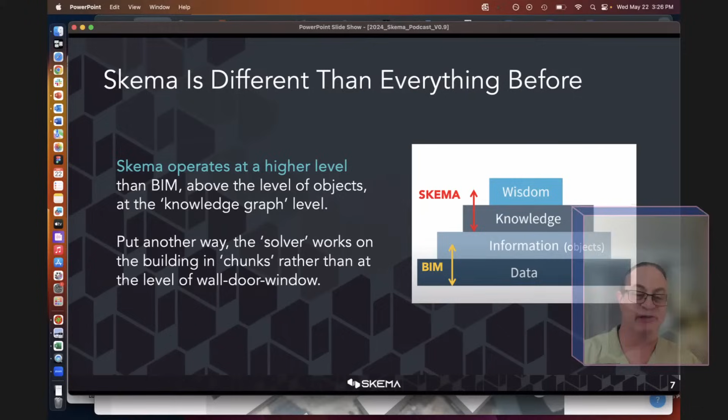And it turns out this is the way that senior design principals think about it. They think about an apartment building as the number of apartment units and of what type. Somebody doing a hospital thinks about, this hospital has to be 200 beds. And then what are all the ratios of support spaces to support 200 beds? And if you're going to do a school, you're thinking, oh, well, I'm going to have 4 grades and each of them is going to have a certain number of students. That requires this many classrooms. And so then what are all the support spaces for a school that has that many classrooms?

And you find that this is actually a very common pattern when you're dealing with building design, that in order to solve the partie, you need some organizing principle for what is the main point of the partie, and then everything else supports that organizing principle.

That's really the way we've designed Skema to work: the chunks match whatever the organizing principle of the parti is, and we have that very explicitly in Skema. But the nice thing is that since we take those chunks from some previous Revit project, whenever you organize a new design in Skema, we can then produce the Revit data that would have resulted from just doing it in Revit—except you don't have to spend weeks doing it. We can do it in a couple minutes.

So that's the big idea behind Skema. It's really two things: this design tool that you use during feasibility and for block and stack to solve the parti of the building—that's Skema AI. And we call it the first BIM knowledge reuse engine because we take Revit as input.

It doesn't have to be Revit. We've taken SketchUp as input. We could take IFC as input. We could take ArchiCAD as input. The input to us doesn't matter, as long as we understand the relationships between the objects and what the graph is, so we can use that as a puzzle piece for you to use in a design later.

I'll talk about what those puzzle pieces do. Then the idea is whenever you come up with one of these finished block and stacks—and you can do as many options as you want—it's just a browser-based application. So you do this in a browser. There's nothing to install, and the learning curve is very shallow.

We don't train an AI on their data. If we wanted to train an AI on their data, we'd need thousands, tens of thousands, millions of projects. We don't do that. We have pre-trained pattern recognition tools that look at their Revit data and help us scale this catalog-building process as we get more companies doing this.

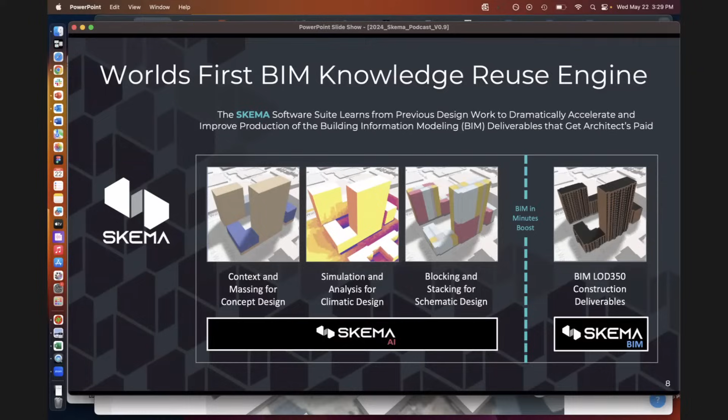But we don't share one architect's data with any other architect. So whatever standards you develop will end up in the Revit files we produce, but they're not just put into a cloud and shared with everybody. It's not like you lose control over whatever special sauce you have as a firm.

But it is why, when you make Revit models out of Skema, they look like the Revit models you've made out of Revit—because we're using the assemblies, wall types, door types, furniture, fixtures, and equipment: all the stuff you've developed as BIM best practices over the last 15 years or so.

For us, we have a conceptual design part of the software similar to other things—this is kind of table stakes. So we have push-pull mass modeling very similar to SketchUp, or any of the other tools out there that do mass modeling in a web browser. We have sustainability analysis, and some integrations with other sustainability tools like Cove.Tool.

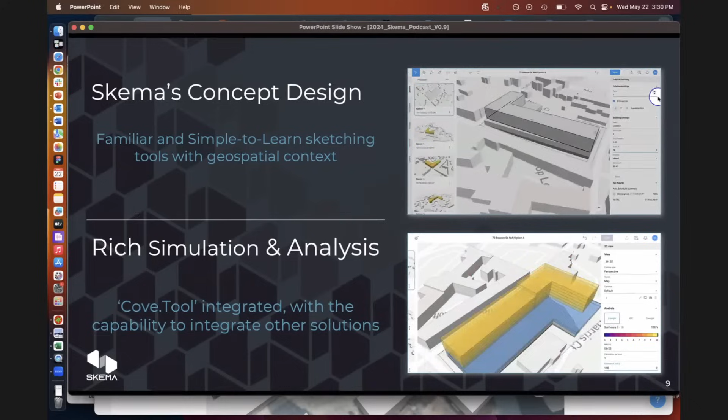The main thing about us is once you get to the mass—and we're working on projects now where you can take, say, a mass in Rhino and pull that in, or a mass in SketchUp and pull that in—because really where we want to shine is this idea of fitting the pro forma into that mass to resolve the block and stack, and the way that works.

So for us, the number one requested feature from all of the current pioneer users of the software is this design catalog manager.

So when we bring in Revit, we look at a chunk of the building and we capture what we call the graph. The graphs are in your BIM data. So we have the layout of all the spaces and the things that they contain, and then the envelope that encloses that, whether it's a demising wall, an exterior wall, or an interior wall that connects to circulation. We capture that relationship and store it in a database.

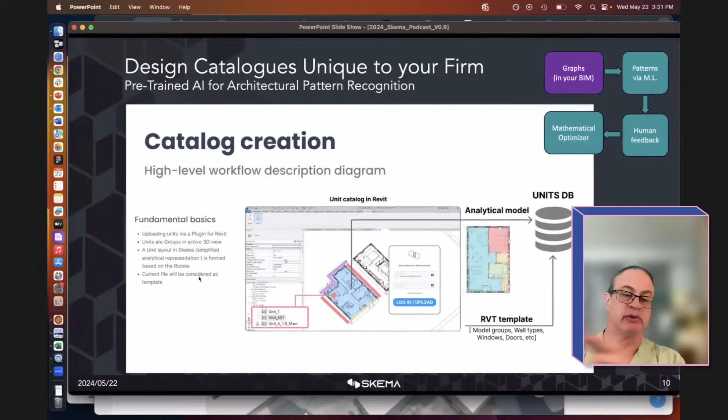And then when you use Skema, those are the puzzle pieces that you see in the interface that we use generators to lay out to give you an initial solve, and you can take whatever we do and move it around. So for instance, when you zoom in, the puzzle pieces are on the left-hand side.

After you use a generator to solve them, you'll get a layout that shows you the corridor space, and here's the layout for, in this case, a residential multifamily building. The puzzle pieces can contain things like exterior balconies and whatnot to vary the facade.

You might get to a situation where you have a corner that's not what you have here in the catalog, where we actually deform the units to make them work with this type of layout. So just because you had something that was a certain size and shape in a previous Revit project doesn't mean it always has to be that size and shape in your future project.

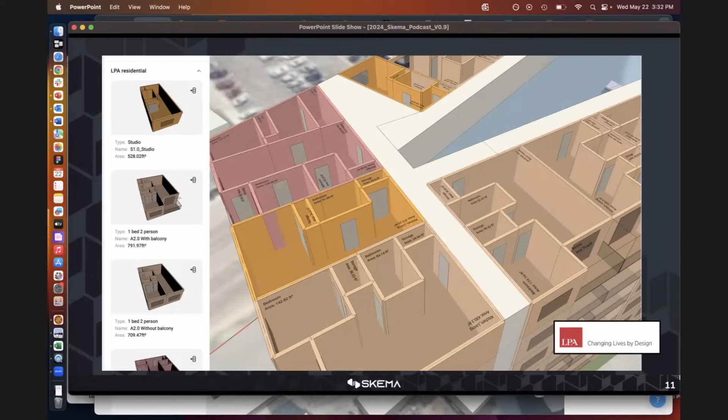We have what we call the morphing tools that will take stuff that you have, and based on constraints that we store in the catalog, change the size, shape, and layout to be infinitely flexible in future situations. So that's the idea behind that.

And that's the main thing, because you can say, look, I know that I have these square things, but I want to do a different facade on this, and I want to have this variation in the facade. So I'm going to take all of these and morph them into these new shapes. That's what the conceptual tool and the schematic design layout supports.

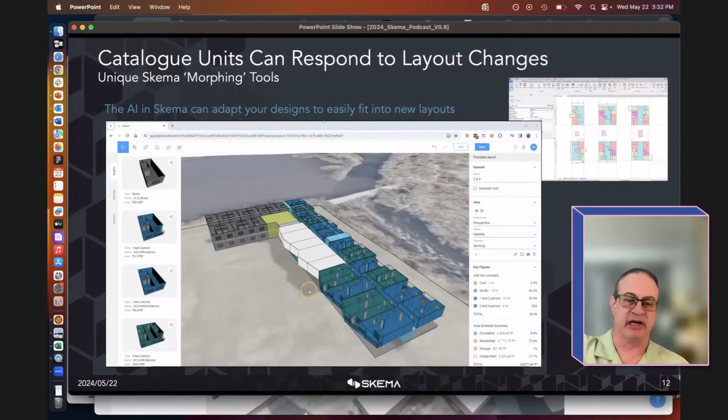You'll see what it looks like in Revit, because there's a Revit version of the catalog that is synchronized with our version of the catalog in Skema here. And then once you generate the building in Skema, we can then generate the Revit model from it.

So roughly speaking, just to summarize, you take things that you have in a Revit model, you turn those into items that we manage in a catalog. Those items in our user interface are in a left-hand sidebar that shows you all the different pieces and parts you have from a previous project.

In working with principals, they think about these things as they're talking to someone who wants to do a new project. They think, oh, this is similar to this project I did 10 years ago. So we're giving them the ability to just borrow from that.

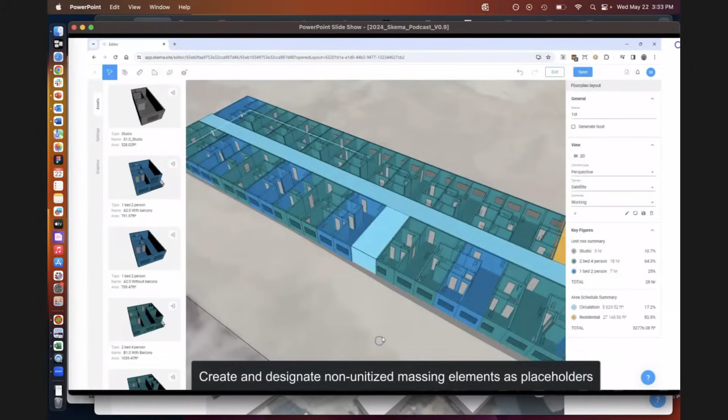We have initial solvers that'll do initial layout. If you don't like what we did and you wanted to do something different, you can just drag and drop things straight out of the design catalog. You can block things out, like a stair core, and say, I'm not going to figure that out right now. I'll do that later in Revit.

Anything that you do on one floor can become a template for other floors. So we'll just say, copy this up to the second floor, but now I'll come and change these out so that these things are actually going to be different layouts that are morphed to this different condition, because I want a different facade on this back wall.

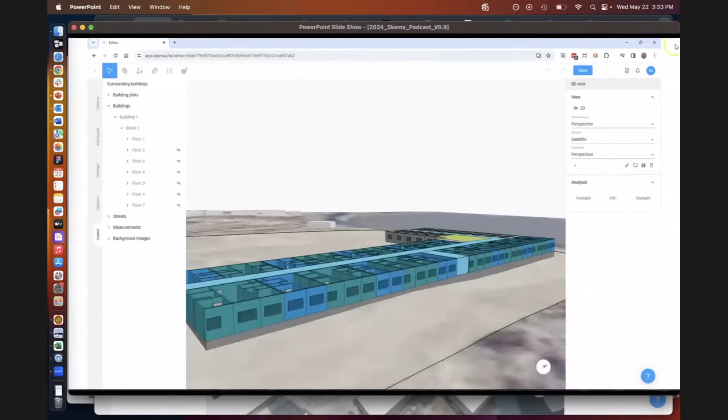No matter what you do, we're going to track the analytics as you work, so you can see where you are from the targets that you've agreed with the owner.

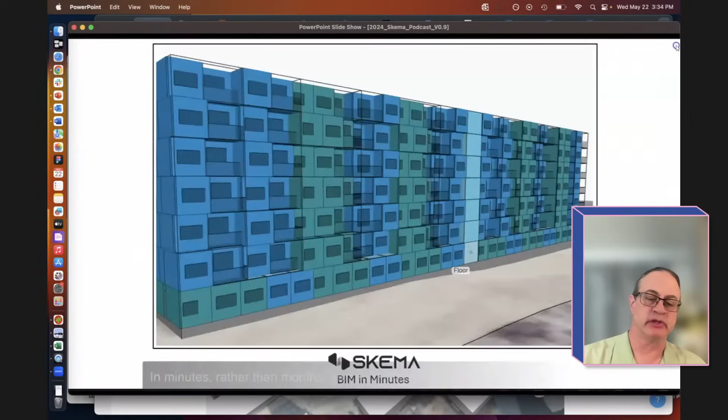Whenever you get to a resolved layout in Skema, you can generate the Revit data, and that Revit data is very complete, high quality Revit data for whatever you've produced in Skema. And we generally do this in one to two minutes, depending on the complexity of the project.

And so that's the core value proposition. The idea is you can do the initial schemes very quickly in Skema, present them to the owner, so that you can go after projects in much less time.

One of the things we found is that principals at architecture firms know that whatever they do in Skema is going to produce valid data in Revit. So when they solve the partie in Skema, they're not going to spend 8 weeks putting it into Revit only to find that it doesn't fit. The level of confidence they get talking to the owner makes a big difference, because when the owner asks how long it'll take to figure out if it really fits, they can say: we know it really fits. If we tell you these are the units you're going to get with this scheme, we're confident that's what you'll get. It changes that early conversation with the owner, giving the architect a level of certainty about the project they didn't have before.

Okay, I have a few questions. Go ahead. So there's a catalog of Revit rooms and layouts, but you mentioned that currently people are privately sending them to you. So is the process automatic? Do we have to go through your human team, or is it automated?

Next week we're announcing the catalog manager, which allows a BIM manager at a firm to create the catalog themselves. Up until now, since we launched last June at the AIA show, you'd have to go through our team and we'd take the Revit data and help you build the catalog, because it wasn't a user-facing tool yet. We had the tools to do it, but they weren't something we'd give to a customer. We got requests from designers saying they want to control the inputs to what happens in Skema so they have full control over all the design elements. So that's what we're delivering next week: the Skema design catalog manager, which lets current customers shepherd this process themselves, independent of us. We'll still help you build your catalog if you want, because we're experts at it, but you're no longer dependent on us.

So when you're looking at much more complicated solves - the very simple solve is an apartment building solve, it's like one line, a double loaded corridor. When you get into solves that are like a two-level solve in a hospital, where you have to first solve departmental adjacencies, then you have a network of connected corridors, and then you have puzzle pieces that are actually interlocking where the two shapes are joined together and have to be adjacent to one another, and you're trying to figure all that out - those are much more complicated solves.

That's when we rely more on machine learning to get us to the initial solves, where we present to the user: these are probably your four or five best approaches. Which one do you want to go with for this particular option?

So that's part of what we're in the middle of. Right now we've been just collecting data and working with customers to understand the use cases around solving the parti. So that's the first case - using machine learning to suggest to the customer the most optimal solve as they're working in Skema.

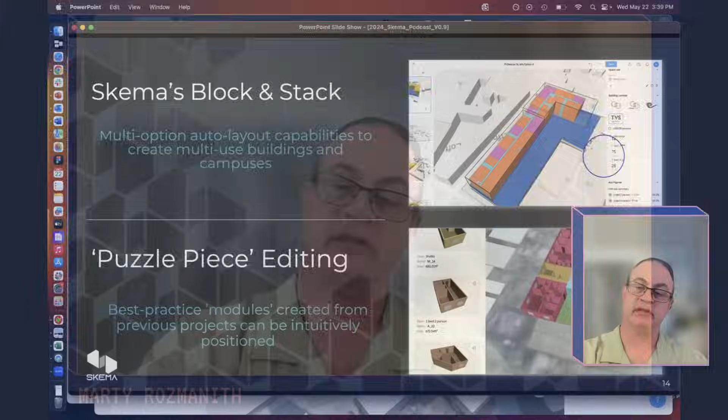The second is when we find a situation where the unit is not the same size and shape as a space we have available, like here in this space, where we're going to stretch this corridor out. And now we've got something that doesn't match anything we have here.

Then we have this morphing algorithm, and that is itself not our own AI. That is an open source Google AI library that's used to morph those types of patterns into new patterns.

So there's really two places: one is applying the catalog to the generative solve - that's one place for use of machine learning. And then the other is in the actual morphing of units to different sizes and shapes.

So unlike Revit groups where they all have to be the same, here they just have to rhyme, right? They have a logic to the layout, and they can be all different shapes and sizes depending on whether you decide you want to morph one to a new size and shape.

How we then manage that data is different, because you could apply a number of different construction approaches. If you want to be strictly modular, you may not want to change all of those every time for every unique condition. You might want some amount of repetition, but we don't want to prescribe that strategy to the architect. We want to give them enough flexibility to do what they need while making it easy to reuse what they have.

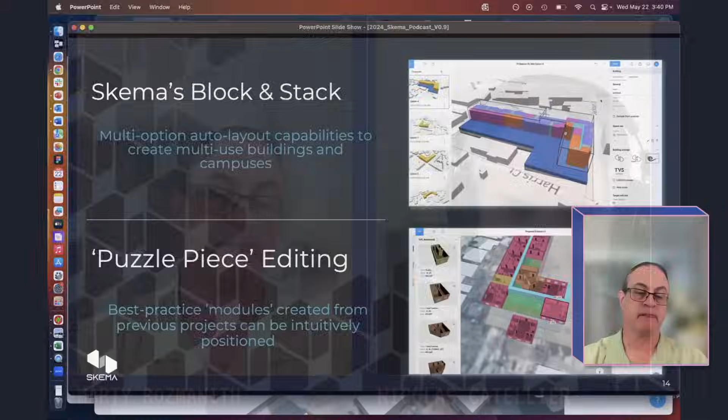So are people - your Skema is doing that and then exporting to Revit. So is it then quite easy to move things around? Because we know with these kind of tools, typically you can get quite close to what you're looking for, but it's never quite exactly right.

And this is the issue with generators - there's always these edge conditions that somebody who built the script didn't think of, right? And so...

We think that - McKinsey did a study of applying modular construction to various building types, and everything in the overall process of delivering a building got faster except design. Because the designers now had to think about the means and methods of the execution of the modular system they were going to use. And so design slowed down.

What we're trying to do is not have design slow down, but produce data that could be used in a different delivery process. And it's an interesting seesaw.

For us, it's a matter of - we're not trying to solve 100% of the building. We think of ourselves as a fast forward button, so that we're the fastest way for you to get to 50 or 60% complete. If you're doing an apartment building, you're still going to have a podium, and that podium is going to have amenities and entries and all sorts of stuff that you're just going to want to go into Revit and do those custom for that project.

But that doesn't mean we can't just apply this to the apartment bar and save you a whole bunch of time not having to lay all that stuff out. So there's always some repetition on these projects.

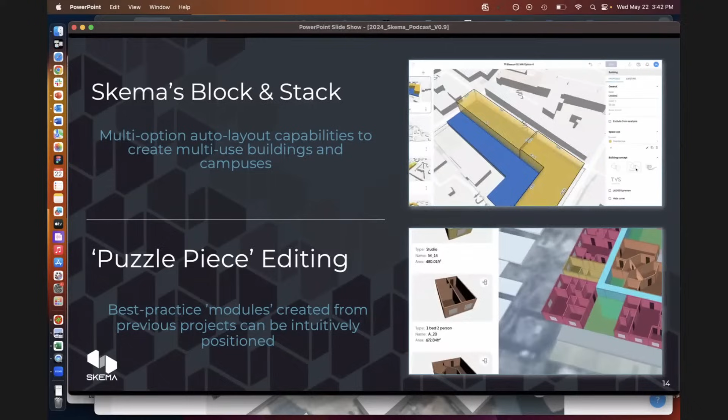Last fall I was on a panel with Karenza Harris of Morphosis, and she was showing this wonderful museum entry that they had done in CATIA. Somebody asked her, could Skema have been used on that project? She said the front part was really custom, yeah, we did it in CATIA, but the rest of it was fairly standard stuff back of house. And yeah, you probably could do something like that in a different type of tool.

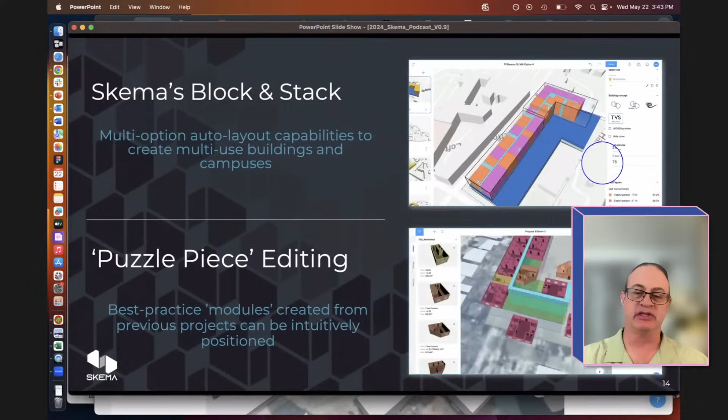So you'll find that a lot of buildings have very similar guts, right? And we're good at the guts, but we're not going to force you to do everything in our tool. We're going to be a node in an ecosystem of web apps that run in a browser, connected using data in a lossless way, as opposed to very lossy file exchanges where people have to do lots of data wrangling. That's how we think about it.

So there's a question multiple people in the chat have been asking: what about MEP? Is this strictly architecture for now? Yeah, for us, Skema is not MEP. Skema is architectural scope.

And so we've done a couple of different things, because our goal is that whatever you do in Skema, in minutes you get a Revit model out of it, even if you don't know how to use Revit. We've had principals at firms generate these Revit models, but these are architectural models.

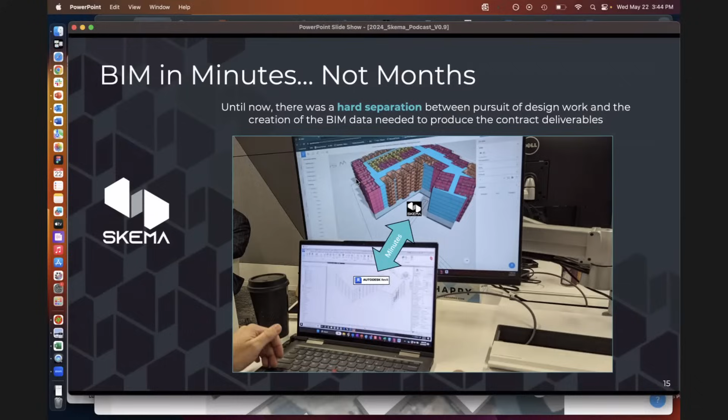However, because we have the higher order layout of the building, and we know where core locations are, where circulation is, where demising walls between units are, those demising walls are attractors for vertical support in a structural system, and those core locations are attractors for shear walls in a structural system.

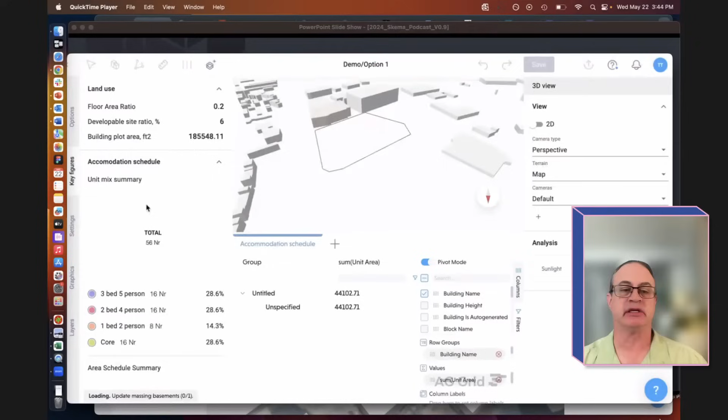One of the things we showed in the suite at AU last year was an integration we did with Thornton Tomasetti, which I'll bring up and play for you, where we take the same Jello cubes we use to generate the architectural scope and pass them over to a machine learning stack Thornton Tomasetti has called Asterisk. What we do is generate the architectural scope from these Jello cubes, but TT has Asterisk generate the steel frame from this.

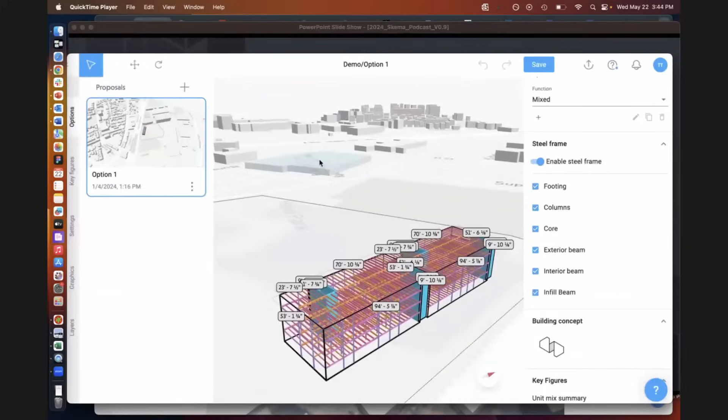In this case, they've taken these positions, the core locations, the demising walls between the units, and inferred where all the column locations are. They've created a stick figure for the primary support. Knowing the building use, they've done a loading model for it, distributed the loads, assigned all the members, sized all the members, and then just sent it back to us so we can display the result.

This is the initial pass. This is not what you're going to take to permit. This is just something that gives you sized data so that, for instance, if you wanted to lay out MEP, you know how likely the beam depth is going to be that you have to miss with the duct or the pipe, so you can do good routing in an automated way for MEP.

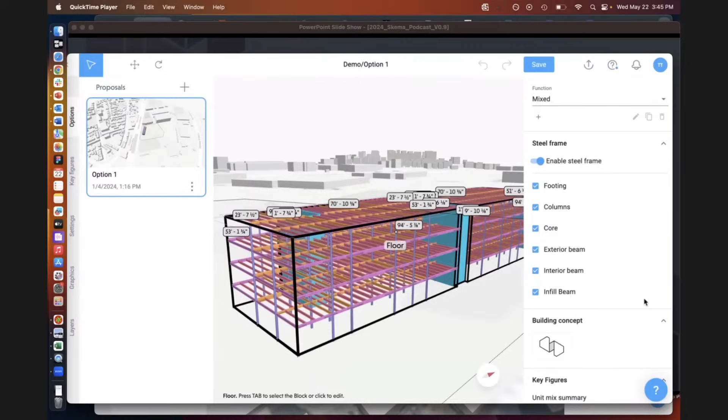It's not our goal to be the Uber platform that does every piece of scope. We're going to do a really good job solving the block and stack and the partie generation in this environment, and then work with partners to use AI to generate other things. So we're choosing to work with Thornton Tomasetti and their Asterisk stack on structural generation, and we're doing a project with Augmenta to take the result of both of those and turn that into MEP generation.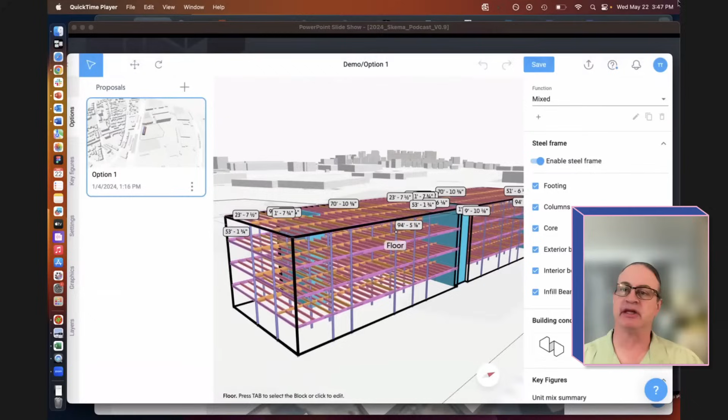So it opens up some feasibility study, design study possibilities that aren't possible right now without these generative tools that are linked together in a lossless data web services kind of way. Anything that has file-based transactions where you've got lots of data wrangling makes it beyond mere mortals to do. That's how we're thinking about our contribution to the ecosystem. We're not going to try and build everything, but we'll work with partners to build those things.

All right, yeah, no problem. So yeah, that does bring me a question.

So if I get this right, you get the catalog, then you go to Skema, you get the parti as you say, and then you can export to Revit, to BIM. So after you export, is your work done with Skema, or is there a back and forth where you can bring some of the data back to Skema, or is it kind of one way?

Yeah, right now we're thinking of ourselves not as a collaboration platform, but as a fast forward button. We do have a multi-user aspect, in that if you've got a project and want to make five or six options, different people can work on all those simultaneously without having to close an option and get out before somebody else does. You can work simultaneously on different options of the same project.

When you push things to Revit, then we're really in the Revit domain and multi-user there. As far as going back and forth from Revit to Skema, that's a workflow we intend to support. We're not in the habit of wanting to write a whole brand new model federation and version controlling layer. Our approach is to do an integration with Speckle and use it as a platform that allows us to do model federation and version control. It's something we're working on now. I don't have an announcement about it, but our R&D teams know each other, so it's a fairly straightforward thing to do. All of those workflows are things we plan to support.

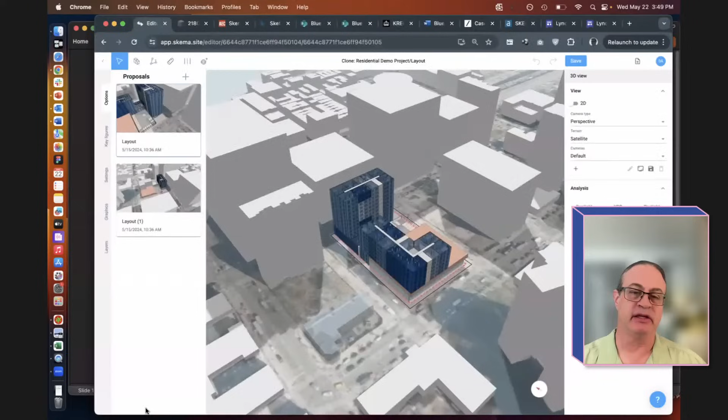Yeah, so this is part of people just seeing Skema for the first time and wanting to get started and see what it works like. So one of the things we're releasing with the announcement next week is a bunch of demonstration projects, with a demonstration catalog you can use just to test drive the thing. Of course, because it's a mandatory thing, we'll have an apartment building, but we'll also have a school, and we'll see how many building types we can put together by the time we release it. But I can show you, this is the demo project for the residential.

The way you invoke the catalog is you actually go to a floor and edit. So let me give you a little tour of what this project is: there's a podium, it's got some parking in it, you can kind of see the stall layout of the parking section. Then there's a multi-height retail and an office component, and then there's a residential component on there.

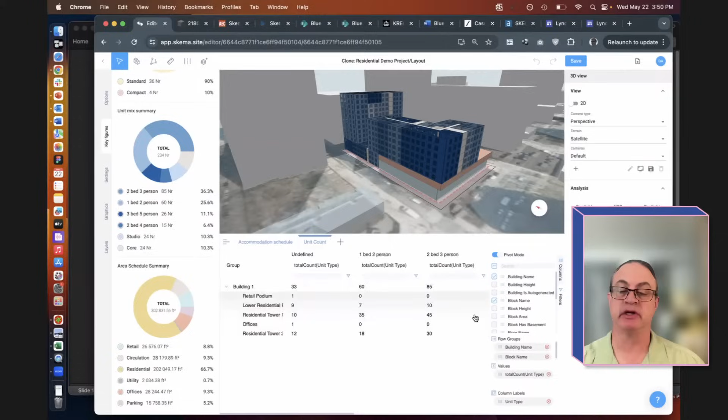And if we go to the key figures, you can see the unit layout, the stall mix in the parking area, and the total mix of all the different space in the entire facility. So as you work, we track all these things. There's sort of a pivot table function where you can do your own kind of analysis if you want to look at things in a different way.

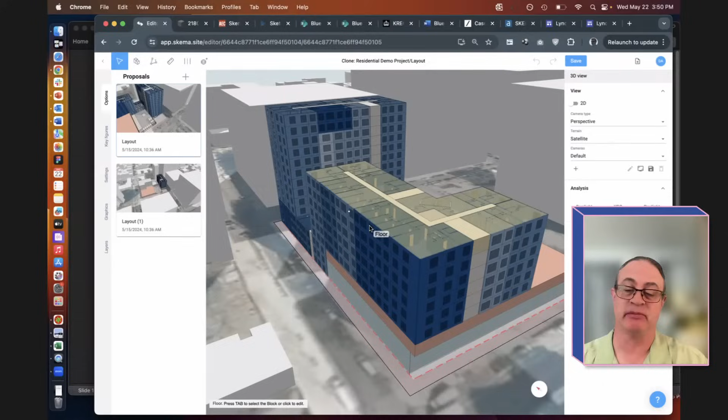But the question was about what if you don't have a catalog? Basically, we're including these demo catalogs, and you can work with those. Mainly, architects that are going to use this have Revit data or some other BIM kind of data, unless they've been hand drafting for the last 15 years, in which case, I guess we'll help you build some catalog data. The way this is organized is that when you tab, at the top level you have the building, and that would be the whole project.

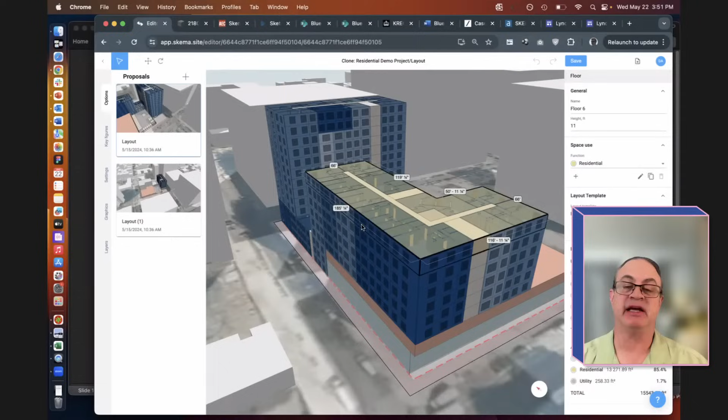As you keep tabbing, you go to the block, which is a part of the building, and then the floor, which is part of the block. If I highlight that and hit edit, that puts me into an edit mode. Think of this as in-place family edit mode, but inside Skema. So now I'm editing this floor inside Skema.

Now I'm looking at, as I'm mousing over, I'm highlighting the puzzle pieces. If I zoom around to this side, you might see, okay, I've got a big apartment unit here. I've got the core location here. That's a dead end corridor. What am I going to do about that?

Like I said, these are magnetic puzzle pieces. So I'll just pick this one up, stick it over here for a minute. I'll take this core and say, why don't I stick you over here? Now you see this down at the bottom, there's this little white dot in the corner. I haven't picked that corner, but I'm near enough that it's saying, okay, that's the magnetic snap I'm using to align myself with other things.

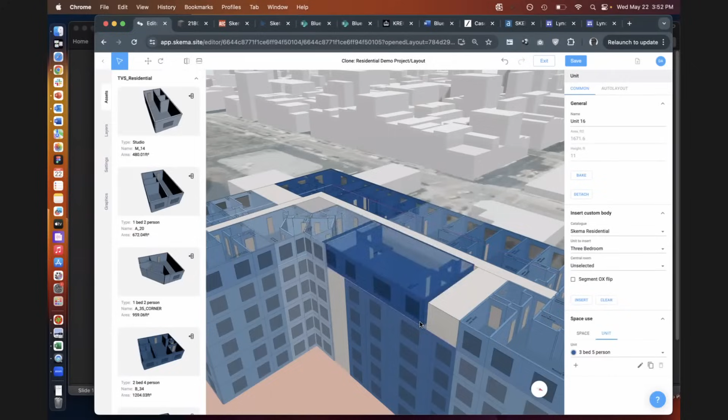So now I've got a precise orientation there. It's not eyeballed, I've actually snapped to the demising wall of this other unit. Now I can bring this back in here, and again, if I grab it near that corner and get that white dot, I'll now snap it here. So now I've redone this floor so I don't have a dead end corridor. If I now say save, what you'll see is this floor is a template for all the other floors, and it's going to update all the floors.

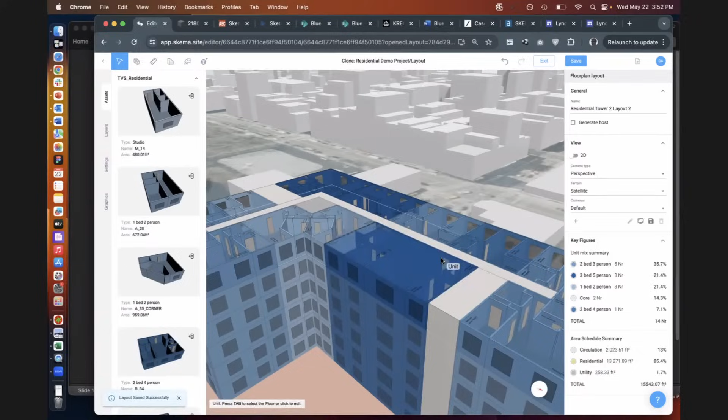And now on all the floors, I've moved the corridor over, the core, right? And now I have a different layout that I've applied to all the floors. So you kind of get the idea, right? We've got these puzzle pieces.

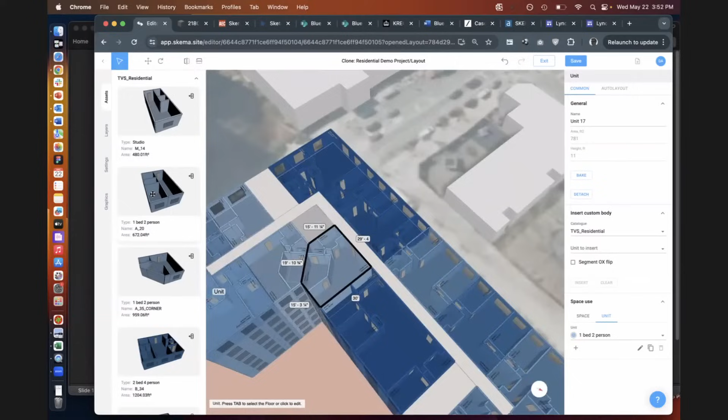We have solvers that will lay out the puzzle pieces for you based on pro forma. And then if you want to do something different, you can just grab a puzzle piece, drag and drop it into the editor, delete something, put something in its place. If you don't like a puzzle piece, you just draw a mass and say morph this unit to that mass, and it'll stretch and pull the puzzle piece.

Someone asked in the chat if you can edit the catalog yourself. So, I can see the catalog, yes. Can you go into edit mode and move things? As of today, no. As of next week of our announcement, yes.

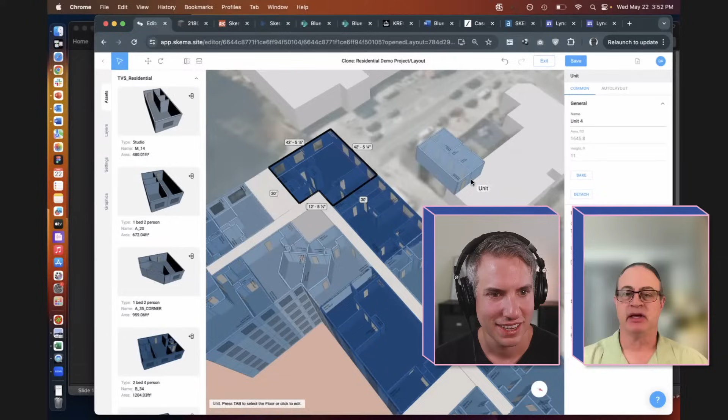Yeah, there's still - it's done using a Revit plugin. So basically, the way that catalog works is you will have a Revit file that contains a project with all the groups in that catalog, and then that is synchronized with the catalog definition in the cloud that turns it into these reusable puzzle pieces. And then through that plugin, you also then pull the data back into Revit.

So we have a Revit export function up here, which I have to save and exit in order to access it. Right now we're directly exporting to Revit from this editor in order to respond to some customer feedback about, well, what if we wanted to push that to ACC or save it to this other place? We're going to allow you to do it as inside Revit in a Revit plugin, so you can pick whatever path Revit's normally used to talking to put that data.

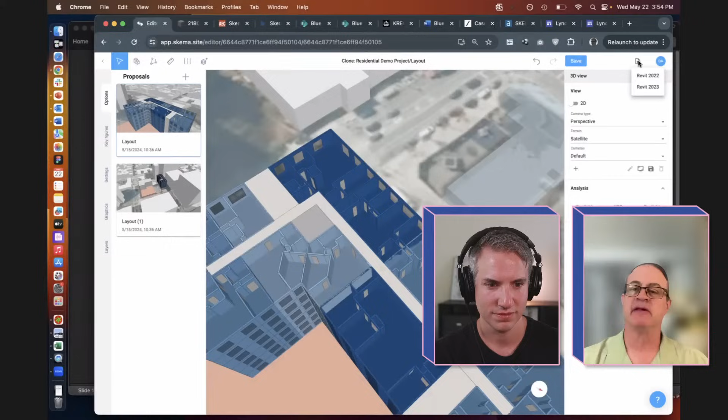So we don't actually exchange files, we do this with a push and a pull through web services. In that way, we don't have a file-based workflow, but we do have to deal with Revit, which still does have a file-based workflow.

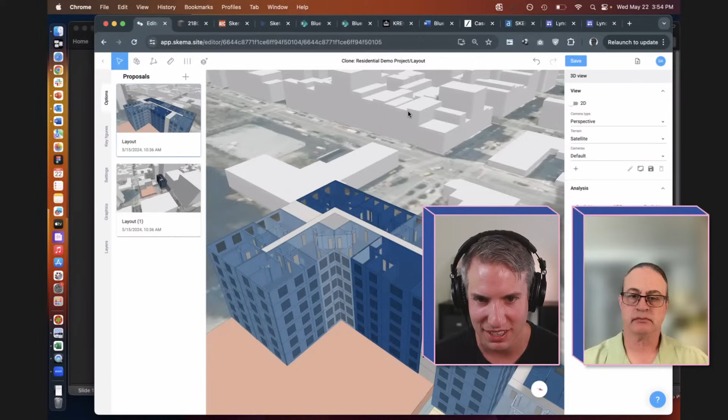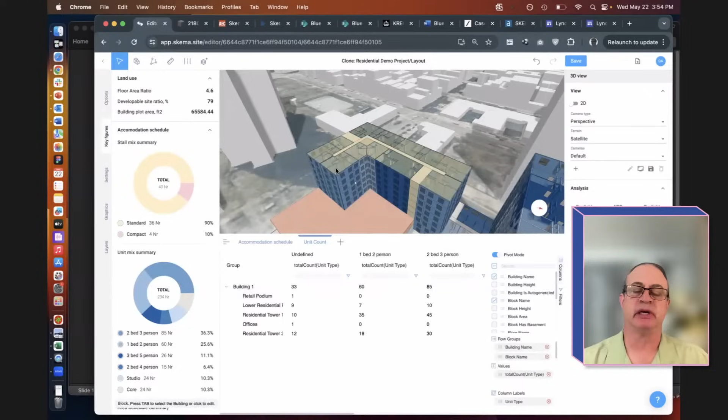A question from Roger asking, how is Skema differentiating itself from Forma? So from what I understand, it's really the customization of all the units that I don't think Forma has. Yeah, I mean, right? Forma doesn't solve the partie for a building. So, if I go to these key figures, I think you can do blocks for these things, but Forma is not going to generate a complete Revit model at LOD 300 of this layout.

The main difference between us and Forma is that Forma is an urban master planning tool that allows you to chop up the floors to turn them into a block and stack, but it is not nearly as proficient in the block and stack and Revit data generation as we are, and we intend to be best in class in those two areas.

So what part of the model has been generated with Skema? The apartment bar—not the podium, but the apartment bar. So in this case, you're using model groups? Yes.

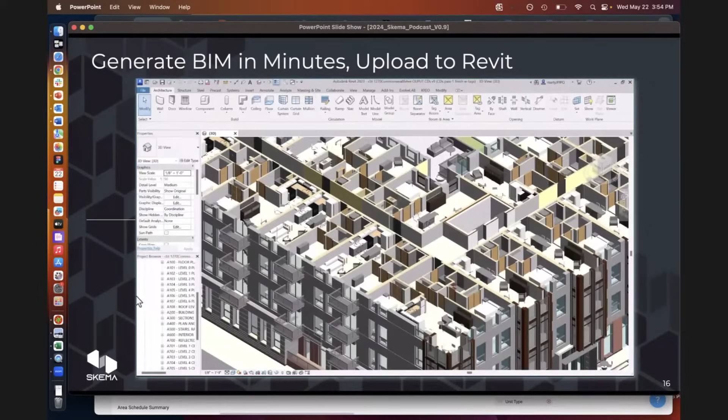Depending on whether you deliver these things modularly or not, if you do modules where you have structural chassis as part of the module, you get double demising walls because you need to stack chassis next to each other. If you're doing site-built or panelized, you won't have double demising walls, you'll have single demising walls. We can do either case depending on the firm's strategy. In this case, you see the double demising walls for a modular strategy.

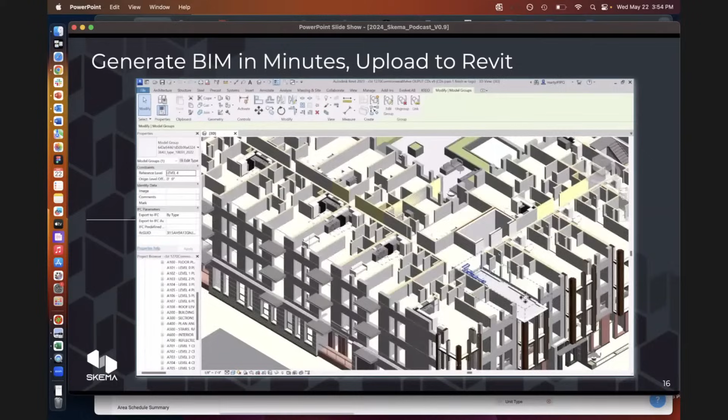Something interesting I could see this solving is all the versioning in Revit—it's always an issue, you keep files in Revit 2021. So I guess that's kind of dealt with within the Skema software, right? So you don't have this constant upgrading and things being deprecated. Right.

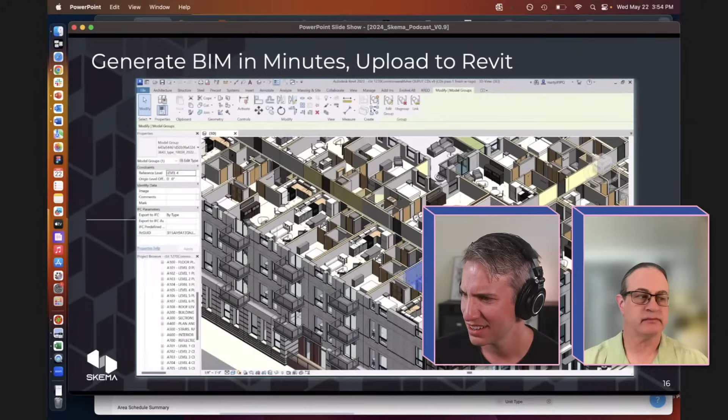Who are your clients? Are you working with lots of modular people, or just no? We specifically went after the architectural community because we think in order for us to stick in the market, architects have to love using it. A customer we've talked about a lot is TVS Design in Atlanta—we've been working with them for about a year now. Other customers include OPN Architects in the Midwest and LPA Design in Southern California.

There are a number of them on our website, so you can see some of the companies working with it. At any point in time, maybe 20 to 25% of our sales prospect pipeline are developers looking at this as something strategic for the way they deliver buildings, not just housing developers. We've had data center owners and medical facility owners ask, could I do a data center with this? Our answer is always, yeah, you can do whatever you want with it, as long as we have groups in Revit that can be used for something like a data unit or a power unit or whatever.

So yeah, we launched it last June, so we've been in the market 9 months.

We're replaying some of the early Revit playbook. At the Revit startup we had a dozen very important customers. In Skema, we call those the pioneer customers, and we have a very special partner relationship with them—they're very honest with us about the feedback, and that's how we get the product market fit, where we don't build the wrong product for the market.

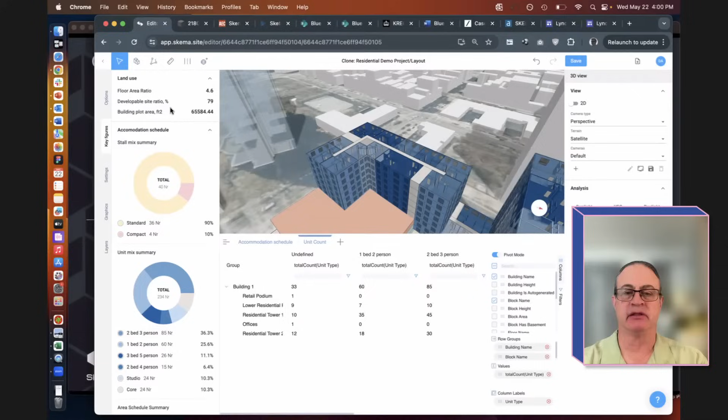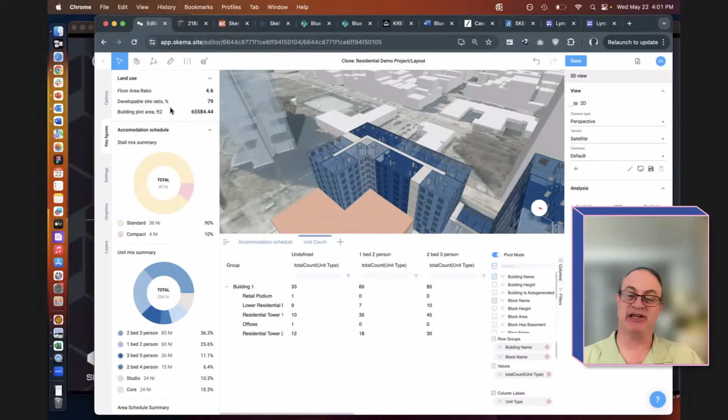There are BIM managers at firms that see this as an opportunity to make best practices easier to use than bad practices. If the catalog in Skema has well-dimensioned chunks with good sustainable materials and all the proper things you want to schedule out, then those are what show up in the projects. So there's an opportunity to foster best practices with this workflow. And if we have to, we could figure out ways to put agents in here as a traffic cop for bad dimensions, but we haven't resorted to that yet.

Okay, so if people want to get started with Skema, how can they do it?

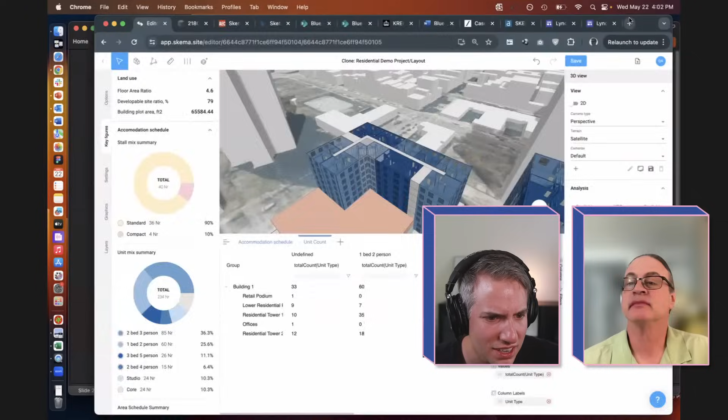MB asks, what about different building standards and rules that we'll take into consideration? So for different building standards, the key point is it's starting from the catalog. You just need to get good catalog data from whatever standards you're using, and what Skema produces is going to be based on that.

Yeah, so generally speaking, we're not trying to be an expert system that checks the architect's work. We're expecting that things you've designed and successfully built in the past are close enough to what you're trying to do again, that they're baked into the Revit data that we're harvesting.

That said, the catalog functionality does have constraints in it, so that as we stretch a unit, if you say this should never be shorter than 6 feet or 2 meters or whatever, you can set those constraints so that as we change the shapes of things, they respect code minimums and clearances. But that is up for the architect to be the expert in. We're not going to try and embed that kind of knowledge into this yet, although there are code checking applications that we may interface with at an API level in order to do that kind of checking work in the future if we get a lot of requests for it from customers.

Okay, I think let this be the final question. Are you mostly working with LOD 200 groups and blocks?